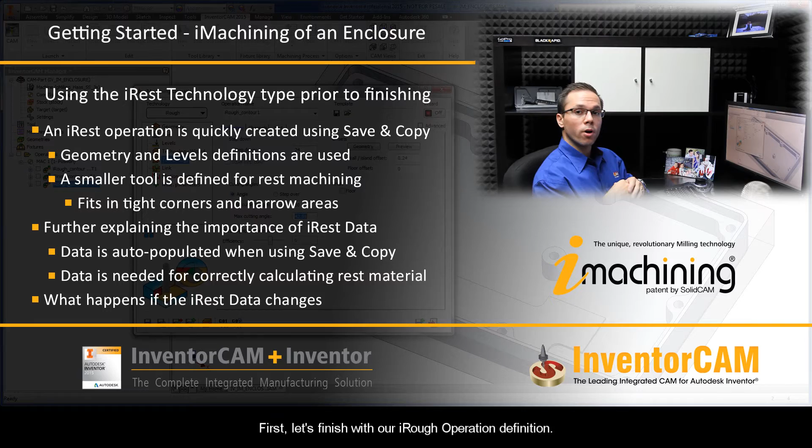First, let's finish with our iRough operation definition. We already have the geometry and tool defined for the operation. Let's start by switching back to the Levels page.

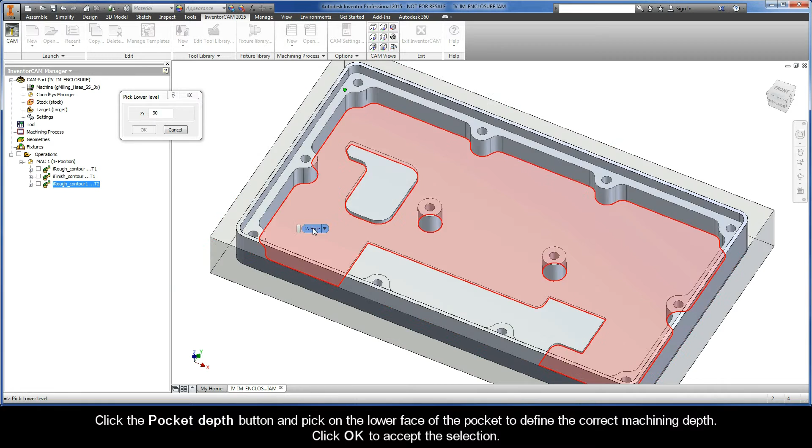We should make sure that we have the correct pocket depth since we changed this in the previous video. Click the Pocket Depth button and pick on the lower face of the pocket to define the correct machining depth. Then click OK to accept the selection.

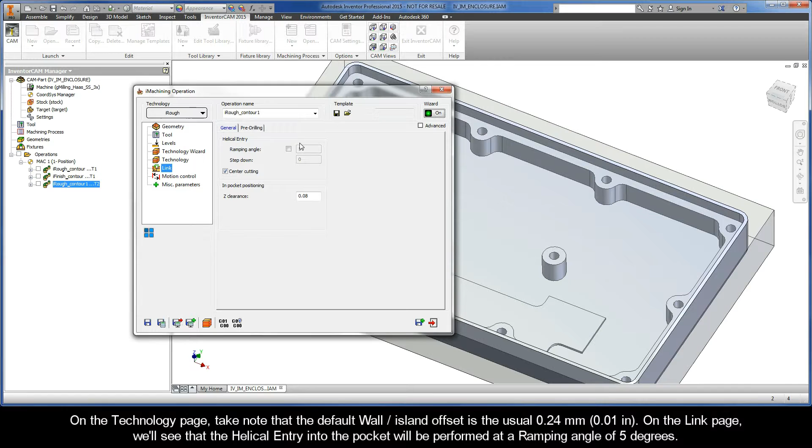Then move back to the Technology Wizard page. Choose Automatic for Step Down and turn the wizard back on using the button at the top right of the Operation dialog box. On the Technology page, take note that the default wall island offset is the usual 0.24 millimeters. On the Link page, we'll see that the helical entry into the pocket will be performed at a ramping angle of 5 degrees. As I mentioned in the previous exercise, the ramping angle parameter is automatically set according to the machining level aggressiveness. Let's now calculate and simulate the results.

Click Save and Calculate, and then click Simulate to open up the Simulation Control Panel.

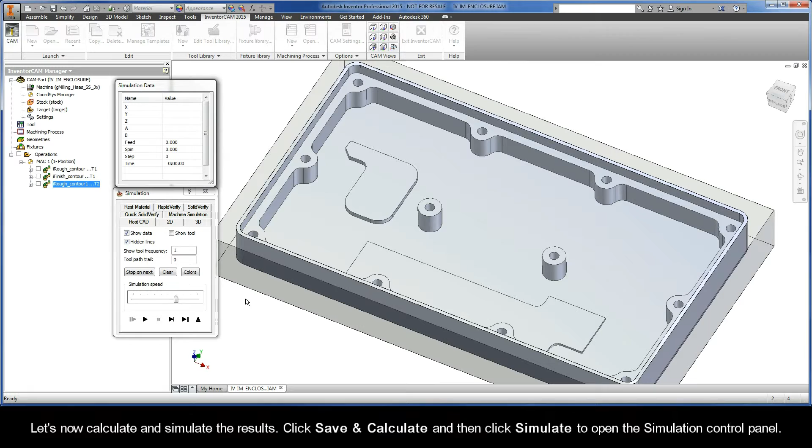I want you to take a good look at the iMachining toolpath for a minute. So zoom into the pocket, set your desired speed, and click the play button. You'll see that the pocket is split into two areas, both of those areas containing a helical entry followed by the pocket roughing toolpath. Due to its size, the tool was unable to fit through these narrow spaces.

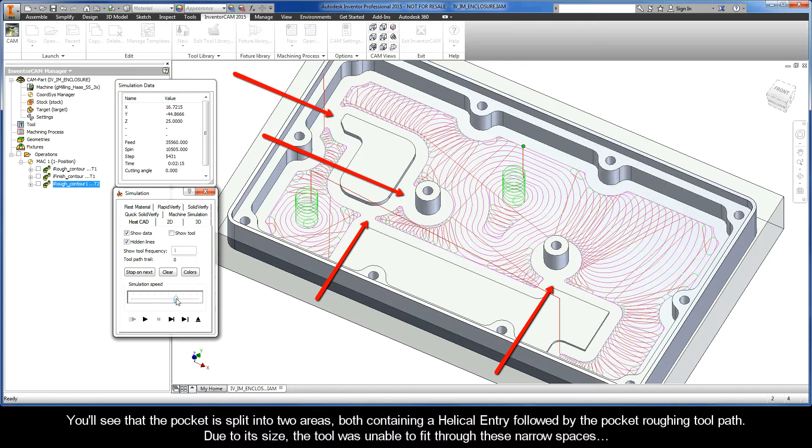So what should we do now? We cannot go straight to finishing, right? We first have to clear out this remaining material. So let's see what iMachining can do for us when we use the iRest technology type prior to using iFinish.

Go ahead and exit the Simulation Control Panel and then click the Save and Copy button to create a copy of the current operation with all the same settings. Some of these settings, however, will have to change.

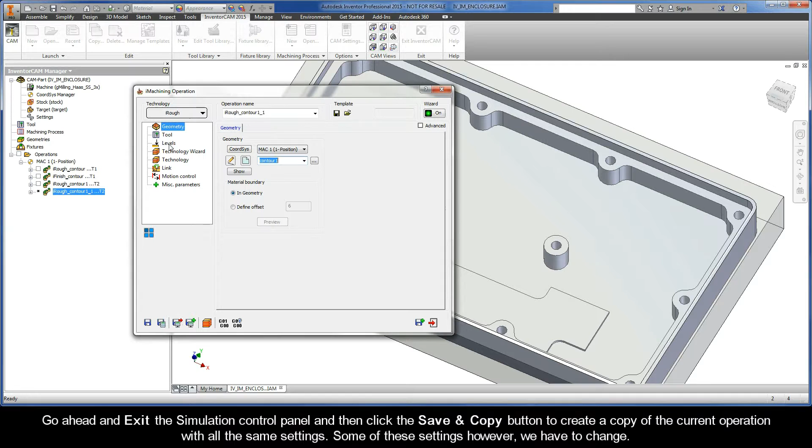First of all, click the Technology dropdown in the upper left corner and choose iRest from the list. Now, as you may have guessed, we'll want to use the Copy Geometry definition. You can take another look at it if you'd like by clicking the Show button. Exit will take you back to the Operation dialog box.

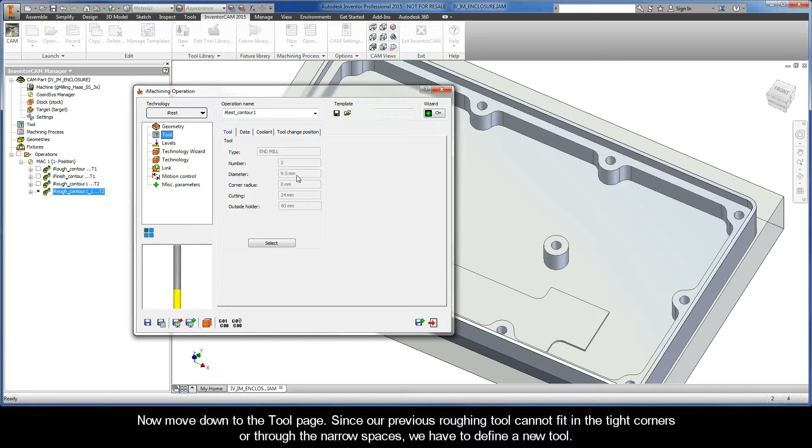Now move down to the Tool page. Since our previous roughing tool cannot fit in the tight corners or through the narrow spaces, we have to define a new tool. So click Select and then the Add Milling Tool button to start the tool definition. Select End Mill from the Milling Tools list.

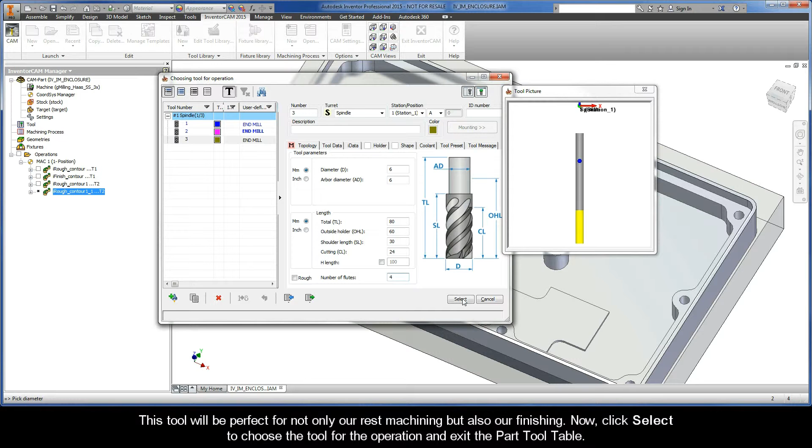Leave just about all the given parameters, but change the number of flutes to 4. This tool will be perfect for not only our rest machining, but also our finishing. Now click Select to choose the tool for the operation and exit the Part Tool table.

We can use the exact same milling levels definitions that were copied over from the iRough operation, and we can even use the default cutting conditions generated by the wizard based on a machining level aggressiveness of 6.

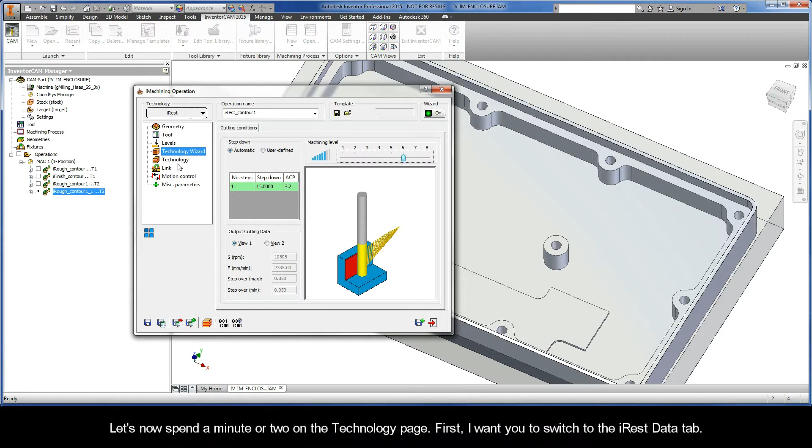Let's now spend a minute or two on the Technology page. First, I want you to switch to the iRest Data tab. Now, as I mentioned in the previous exercise, there are 3 important values needed for calculating rest material: previous tool diameter, previous wall offset, and previous fillet radius.

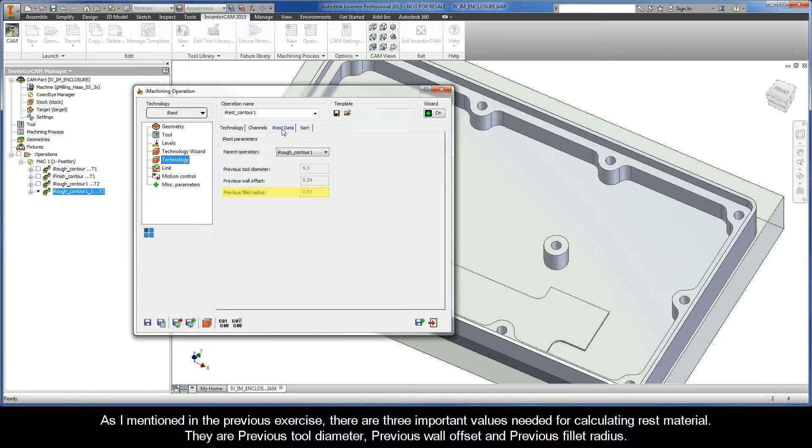When using the Save and Copy function, the previous parent operation is chosen by default, and the fields are automatically filled with the associated values. In the instance the previous operation is not an iMachining operation, these values may also be entered manually by choosing User Defined from the drop-down list.

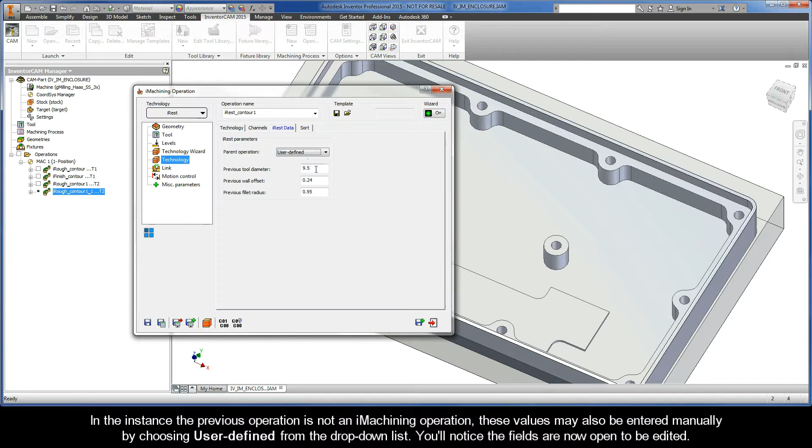You'll notice that the fields are now open to be edited. For the purpose of this exercise, we should just leave the default selection of iRough Contour 1.

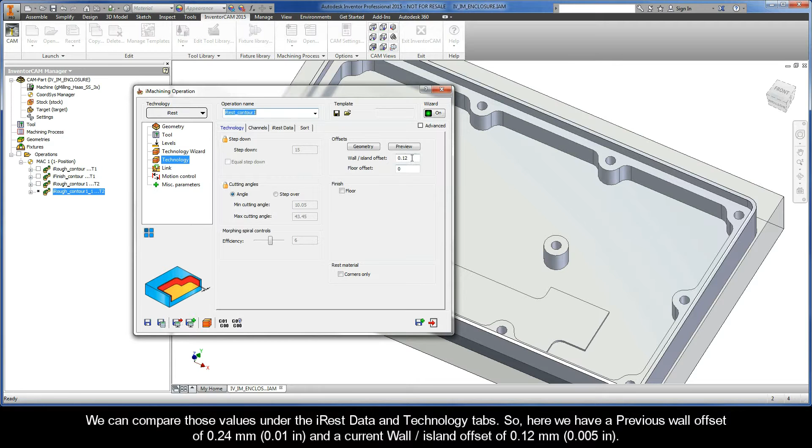Now, it's important for you to know that the wall island offset for rest material must be greater than 0 but less than the previous wall offset. We can compare those values under the iRest Data and Technology tabs. So here we have a previous wall offset of 0.24 millimeters and a current wall offset of 0.12 millimeters.

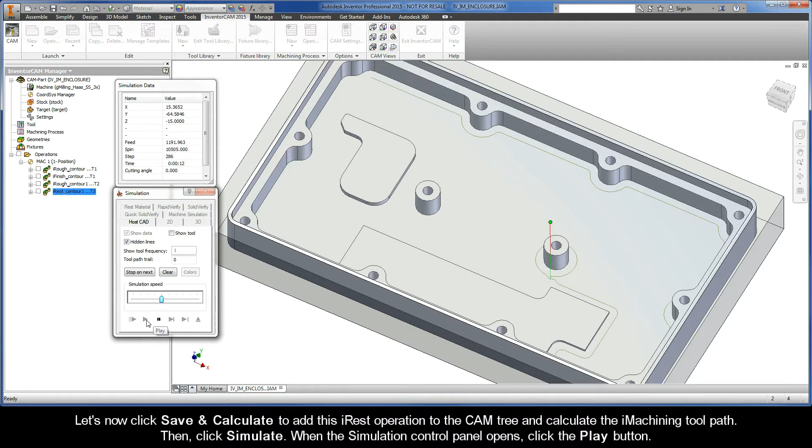Let's now click Save and Calculate to add this iRest operation to the CAM tree and calculate the iMachining toolpath. Then, click Simulate. When the simulation control panel opens, click the Play button. The tool performs the rest machining and works around the walls, islands, in the corners, and through the narrow spaces.

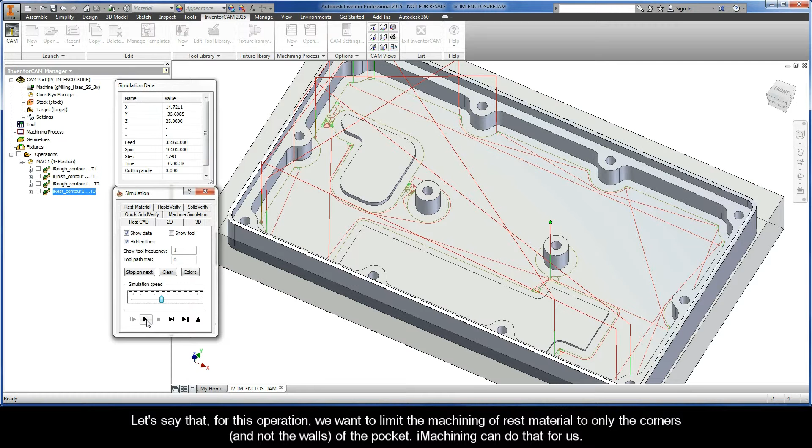Let's say that for this operation, we want to limit the machining of rest material to only the corners and not the walls of the pocket. iMachining can do that for us.

Exit the simulation control panel, which will take us back to the technology page. In the rest material area, select the corners only checkbox. Using this option could help us save on cycle time. Note that the wall island offset is now inherited from the previous operation, and the input field is locked from being edited.

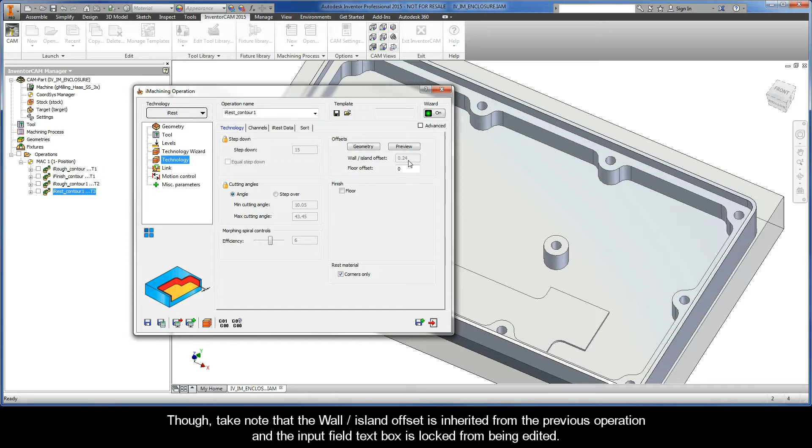Let's calculate and simulate the new results. Click Save and Calculate, and then click Simulate. When the simulation control panel appears, click the Play button.

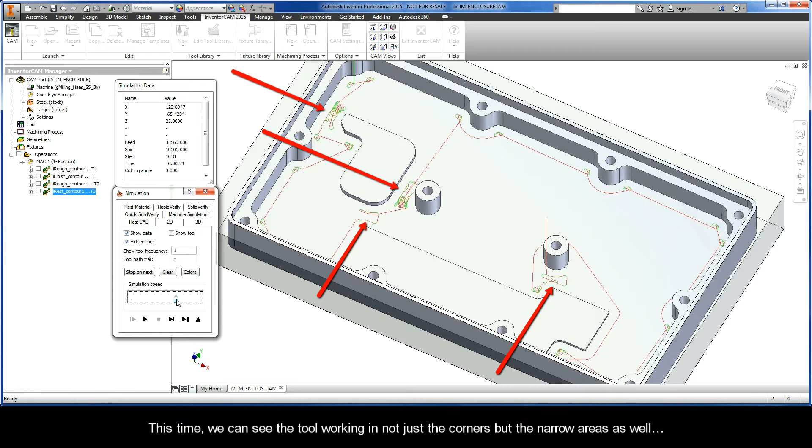This time, we can see the tool working in not just the corners, but the narrow areas as well. You can see here that we even reduced the cycle time by almost half.

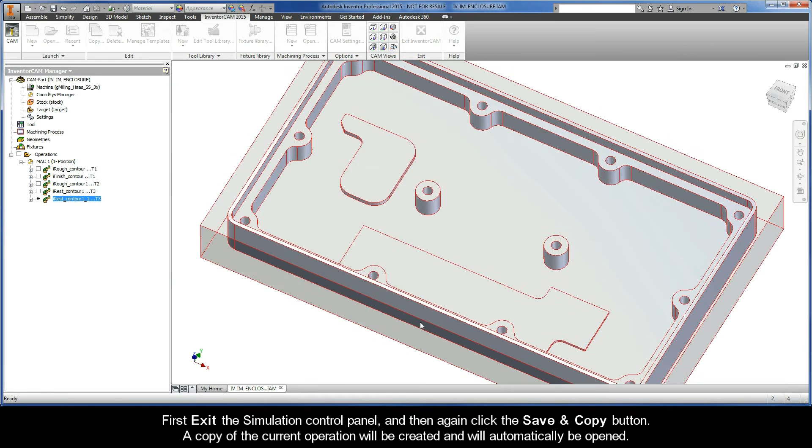Now we can perform the finishing of the walls and islands of the pocket using the iFinish technology type. First, exit the simulation control panel, and then again click the Save and Copy button. A copy of the current operation will be created and will automatically be opened.

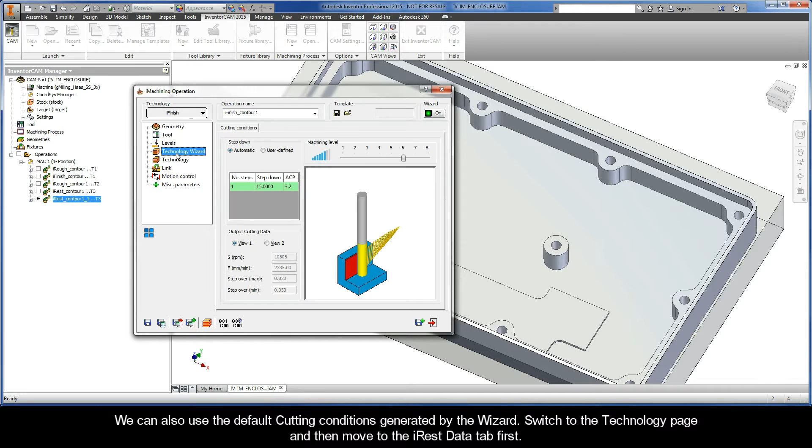Change the technology type to iFinish. In this case, this is all we have to do. We will use the copy geometry, tool, and levels definitions from the previous iRest operation. We can also use the default cutting conditions generated by the wizard.

Switch to the technology page and then move to the iRest Data tab first. You'll see that the previous iRest operation is selected as the parent operation by default, and the fields are automatically filled with the 3 important values needed for calculating rest material.

Now switch back to the Technology tab. We can see that the wall island offset automatically defaults to 0. We are also presented with some toolpath optimization strategies for finishing.

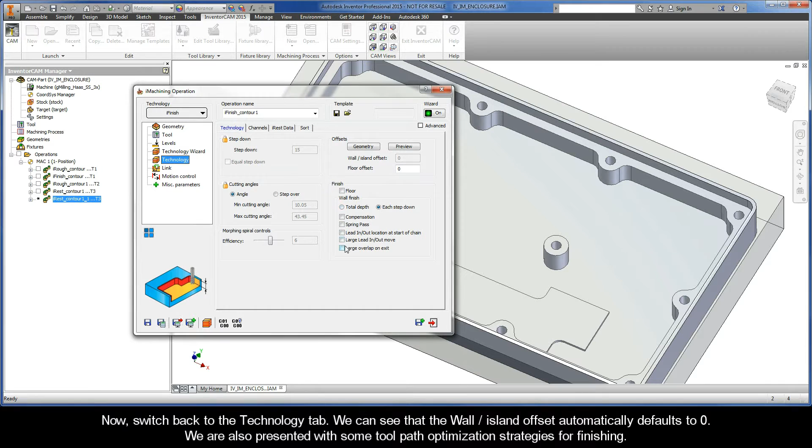We will only need to finish the walls and not the floor. In this case, we can select either total depth or each step down in the wall finish area, since these depths are the same. For this example, let's also select the Spring Pass checkbox.

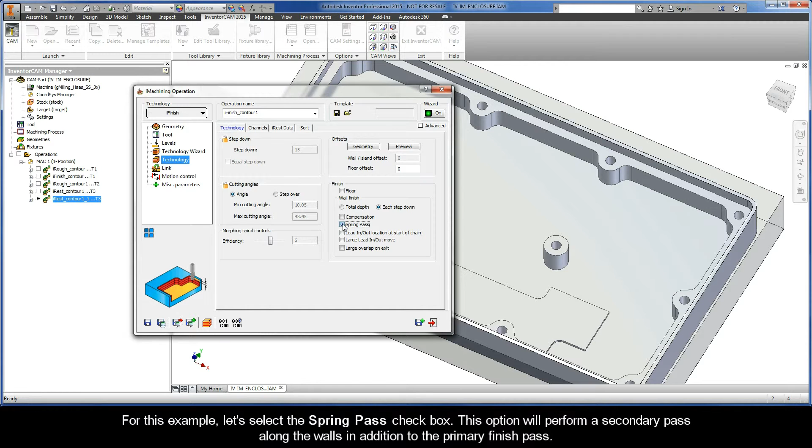This option will perform a secondary pass along the walls in addition to the primary finish pass. It aids in offsetting tool deflection to ensure that parts are finished more accurately and dimensionally correct.

Now, since this operation will remove the original 0.24 millimeter allowance, it may be a good idea to use this option. Finally, we can click Save and Calculate to add this iFinish operation to the CAM tree and calculate the iMachining toolpath. Then click Simulate to open up the simulation control panel.

We'll use the host CAD mode, just like we've been doing all along. I would first slow the simulation speed down, and then click the Play button.

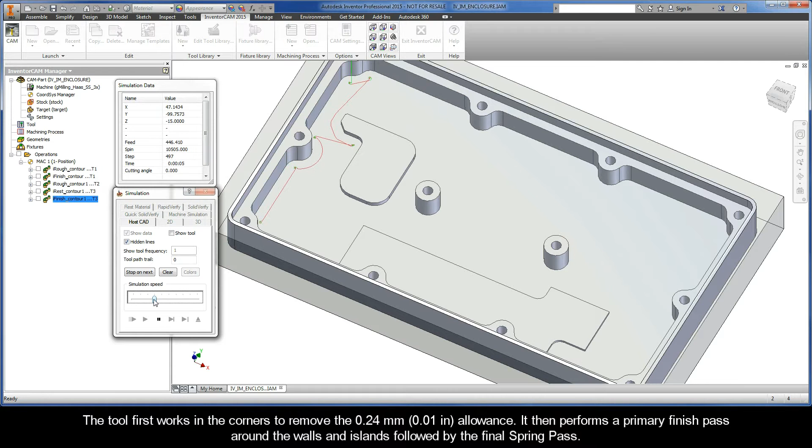The tool first works in the corners to remove the 0.24 millimeter allowance. It then performs a primary finish pass around the walls and islands, followed by the final spring pass. Let's now exit the simulation control panel.

Now I would like to quickly talk with you about synchronization. It is important to know that rest machining pulls data from a previous parent operation, as shown before in the iRest Data tab of the Technology page.

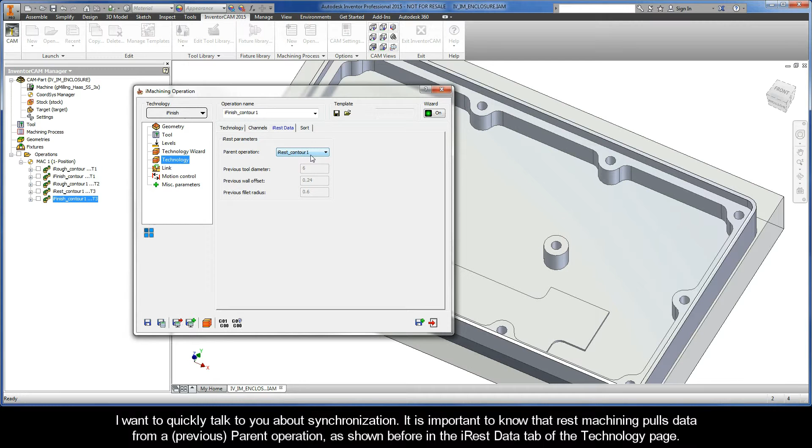If one of these 3 important values changes, the data will update, but the latter operations will need to be recalculated. So, for example, let's exit the iMachining operation dialog box and edit our previous iRough operation.

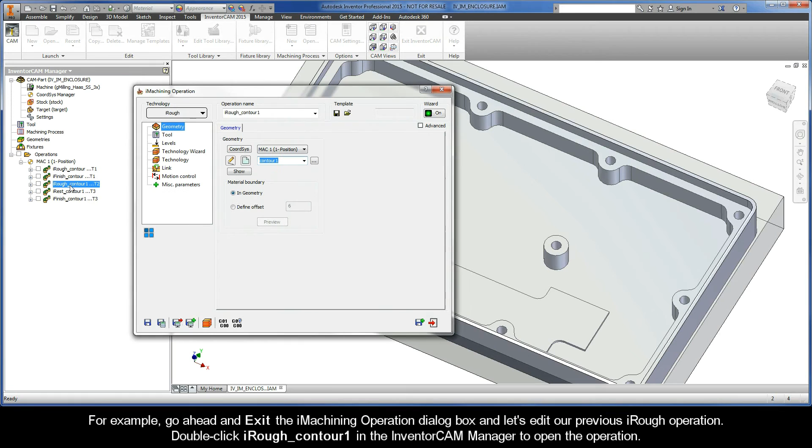Double-click iRough Contour 1 in the InventorCAM Manager to open the operation. Switch to the Technology page and change the wall island offset to 0.12 millimeters. After clicking Save and Calculate,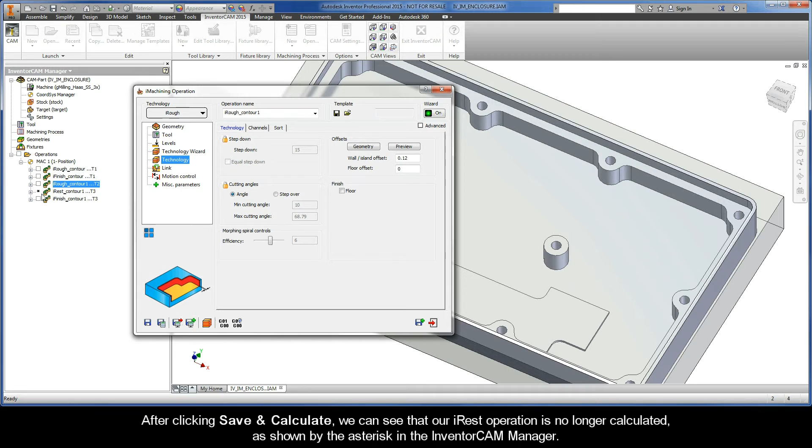we can see that our iRest operation is no longer calculated, as shown by the asterisk in the InventorCAM Manager. We'll need to first exit our current iRough operation. Then double-click iRest Contour 1 in the InventorCAM Manager to open the operation.

If you switch to the Technology page, you'll see that the wall island offset parameter and iRest data have been updated. We can click Save and Calculate to recalculate the operation.

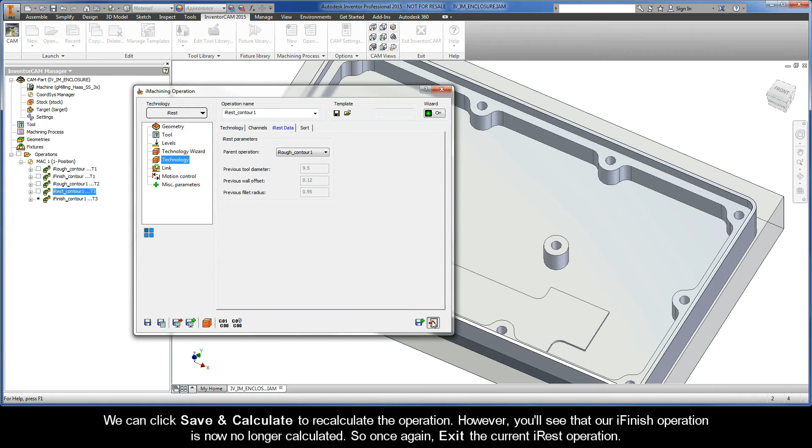However, you'll see that our iFinish operation is now no longer calculated. So once again, exit the current iRest operation. The iFinish operation we can recalculate from the CAM Manager. To do that, right-click iFinish Contour 1 and choose the Calculate command to recalculate the operation with updated iRest data. I'll go ahead and end Part 4 right here.

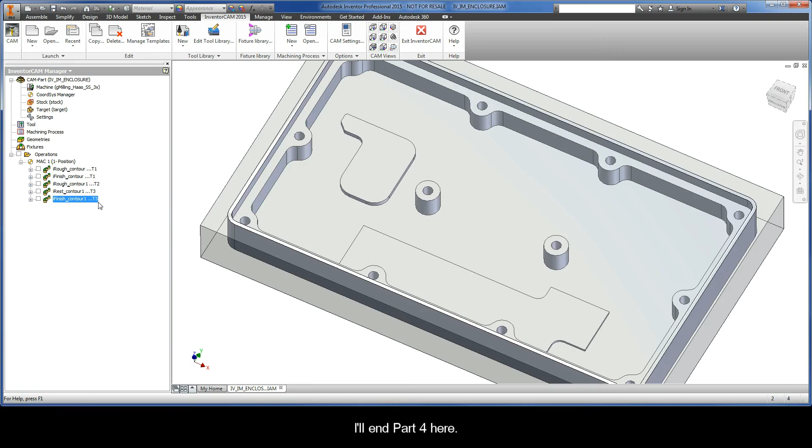So there you have it. We just defined the machining of the pocket using the iRough, iRest, and iFinish technology types in iMachining.

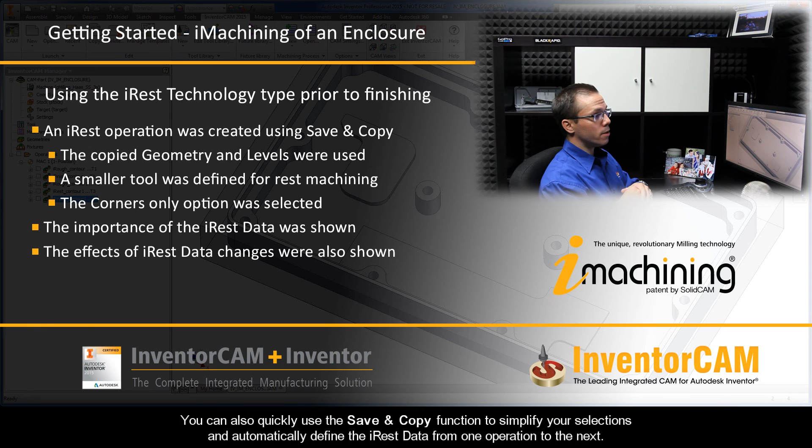Now, in instances where you have pockets with island configurations that prevent the roughing tool from being able to fit in some areas, don't worry. You can easily use the iRest technology type prior to finishing. You can also quickly use the Save and Copy function to simplify your selections and to automatically define the iRest data from one operation to the next.

Now, join me for the last part in this series where I'd like to talk with you about the tool definition and what parameters specifically affect iMachining and the wizard.